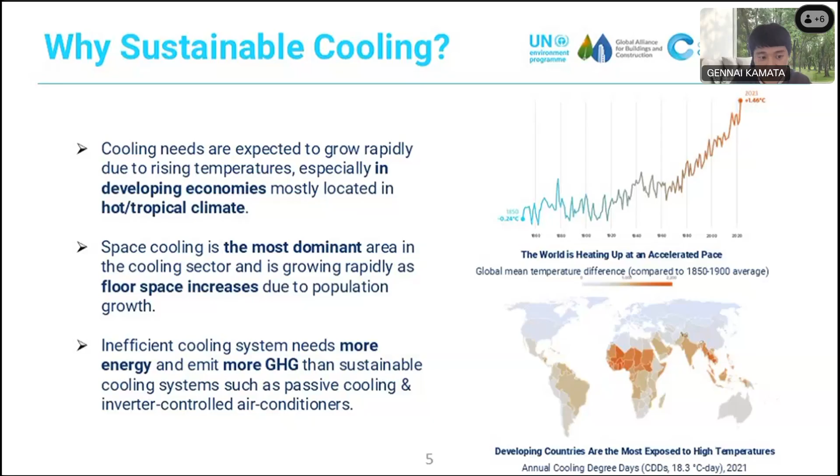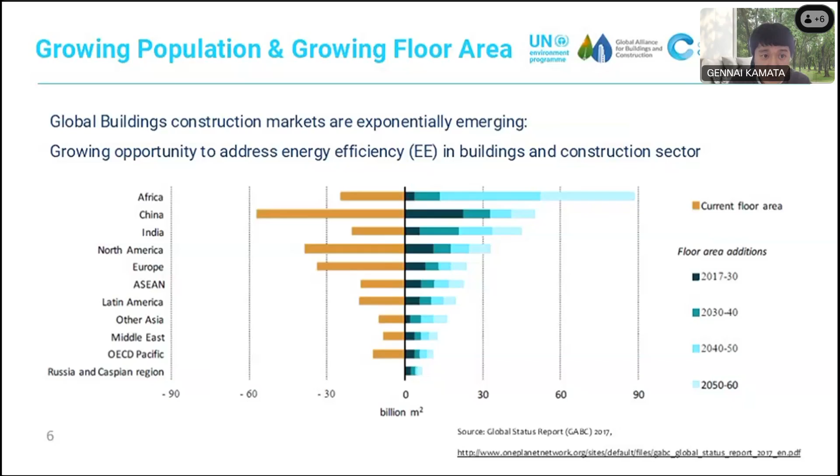So when we use cooling strategies, this needs to be very sustainable. When I mean sustainable space cooling, it basically covers passive cooling and also active cooling and energy efficient appliances such as inverter-controlled air conditioners. This phenomenon of increasing floor area is critically happening in Africa, China, India, and other Asian countries, just because these regions are having more and more population and urbanization.

Next slide. When I deep dive into the topic, first I want to mention energy consumption and GHG emissions in the building sector. This data comes from the Buildings Global Status Report, which was just recently launched this Monday. This report basically explains that one third of global energy consumption and CO2 emissions are actually attributed to the building sector. In the breakdown, we have more operational emissions than embodied carbon.

Operational emissions reached 9.8 gigatons, while embodied carbon reached 2.9 gigatons. Even though it is said that embodied carbon will reach the same level as operational carbon by 2050, we still need to address operational emissions through designing better buildings. Space cooling is one of the critical topics we need to address to reduce operational emissions.

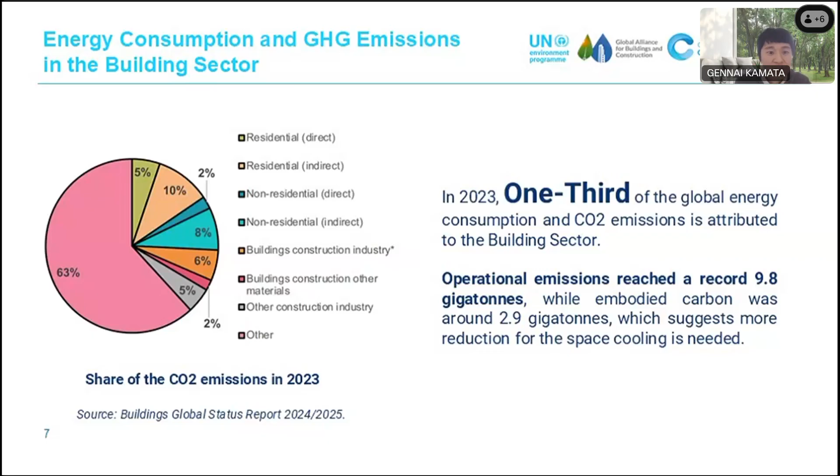As I mentioned, this is the global status report from the Global Alliance for Buildings and Construction. This annual report basically covers the progress of the building sector in terms of policy, finance, and technology. One of the critical topics is about cooling - it introduces data saying that cooling remains the fastest growing end use in the building sector, particularly driven by the Asia-Pacific region, having increased at an average rate of 4% per year since 2000.

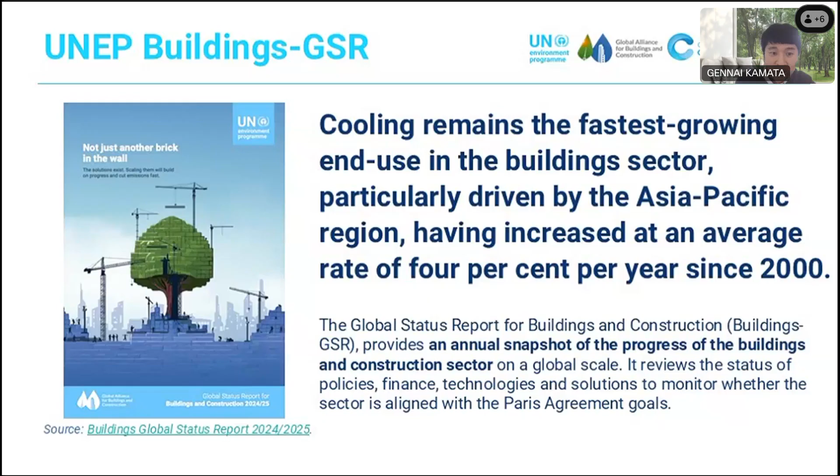And from the Cool Coalition perspective, we launched this Global Cooling Watch report at COP28, as Lily mentioned at the beginning of this webinar. It basically introduces a pathway towards near-zero emissions in the cooling sector. And one of the focus areas is passive cooling. It introduces one data point that says passive cooling can reduce cooling demand by 24% by 2050, saving up to $3 trillion USD in equipment costs and 1.3 trillion tons of CO2 emissions.

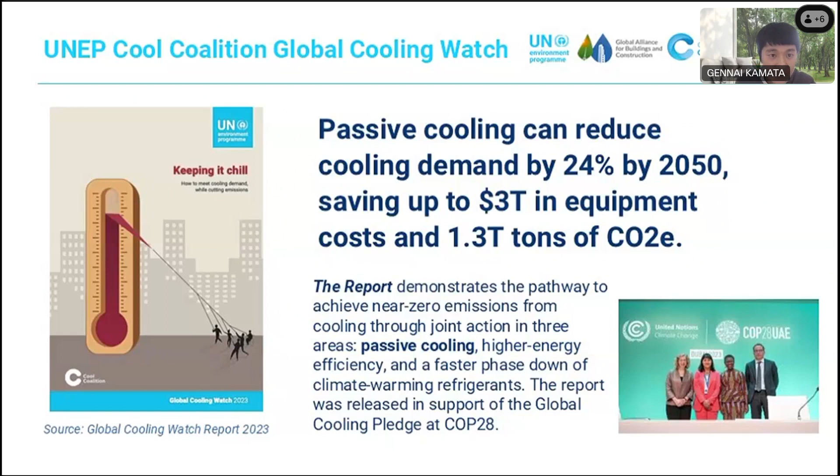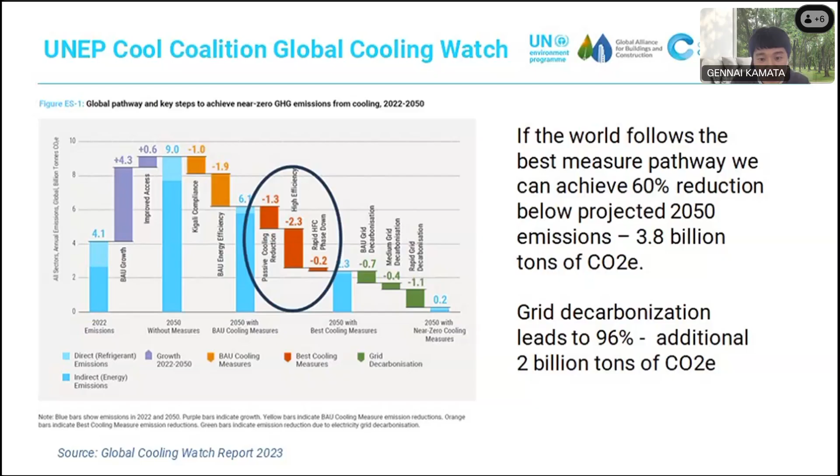So space cooling is a very significant area to address. From the report, it's estimated that in 2050, in a BAU scenario, we are emitting 6.1 gigatons of CO2 emissions. However, if we take measures such as passive cooling or energy efficiency in appliances, as well as a faster phase down of HFCs, we can actually arrive at 2.3 gigatons of CO2 emissions, which is a 60% reduction from the BAU scenario in 2050. And it can actually save 3.8 billion tons of CO2 emissions.

And now let me focus on this cooling finance report that we are going to feature in this webinar. This report was published last year. The main topic of this report is to size the market opportunities that sustainable cooling represents across emerging and developing economies. It also brings attention to challenges and opportunities for financing sustainable cooling in the context of these countries, and provides a blueprint on how to finance sustainable cooling. Let me introduce some of the data that we found from this report.

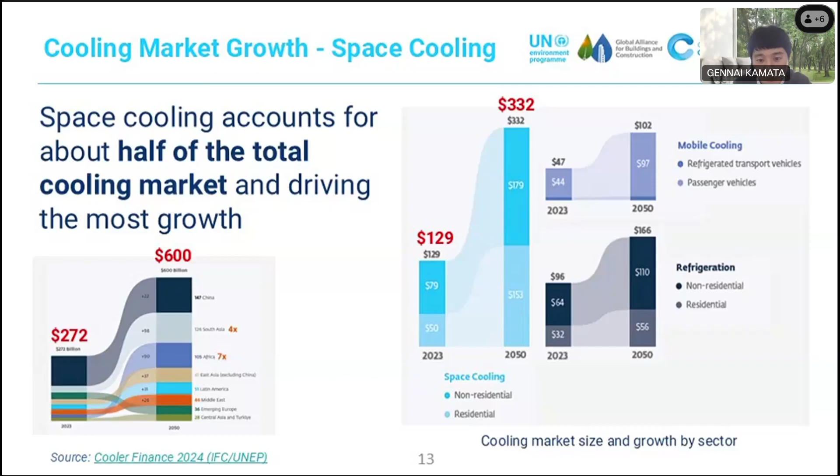And if you look at the breakdown of the total cooling market, space cooling actually accounts for half of it. If you look at the graph in the middle, in 2023, the space cooling market is 129 billion USD. However, it's estimated to grow to 332 billion USD in 2050. So this is going to be 3 times larger, and it's actually larger than other cooling sectors such as mobile cooling or refrigeration. And within the space cooling market itself, active cooling accounts for almost 90%, while passive cooling is 30 billion USD.

And also, if you look at building types like new buildings and retrofits, for new buildings the current market size is 15 to 25 billion USD per year, while retrofit of existing buildings is 10 to 15 billion per year. So now active cooling accounts for most of the share of the space cooling market. However, in order to achieve a net zero emission society, we need to accelerate passive measures, because these are low-hanging and cost-effective measures.

And the benefit of passive cooling is that you can save electricity costs in the operational phase of buildings. So if you accelerate sustainable cooling, consumers in developing economies can actually spend 6.4 trillion USD less by 2050.

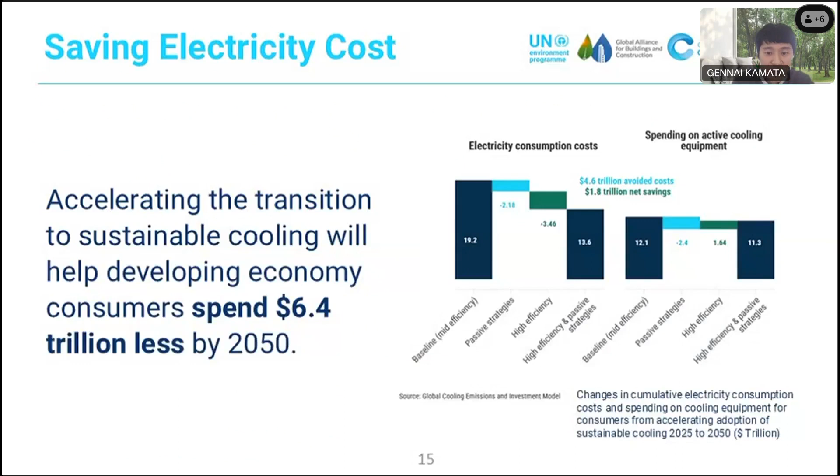So now let me deep dive into the solution part of passive cooling from the finance perspective. First, let me explain a little bit about what passive cooling is. I think most of the audience already understand this concept, but basically passive cooling is a measure that tries to reduce the dependence on active cooling, such as air conditioners. And these passive cooling measures have been with us since ancient times. So this is not a new technology.

The architects, design professionals, don't necessarily understand this concept, unfortunately. I am an architect, and I also had education in the university, but most architects are interested in how to design the building as beautiful as possible. They only look at aesthetic aspects, and they don't have the opportunity to learn about this kind of energy aspect. So in reality, even though these technologies are there, architects often don't understand this technology and don't reflect it in their buildings. And that's why it's not spread well.

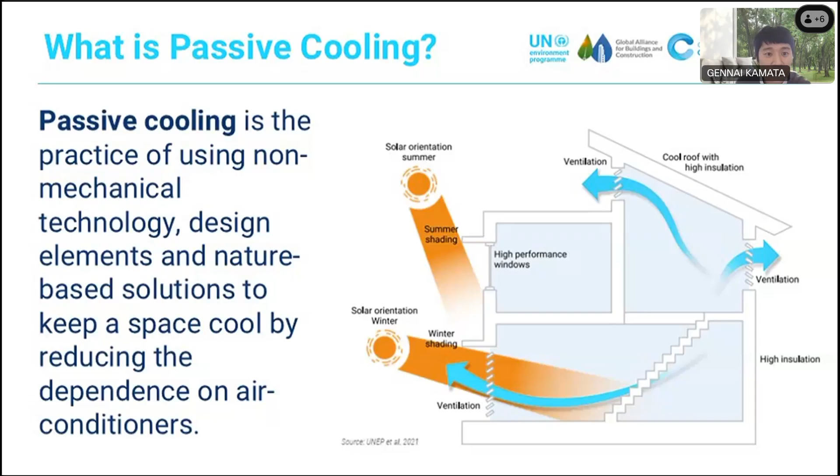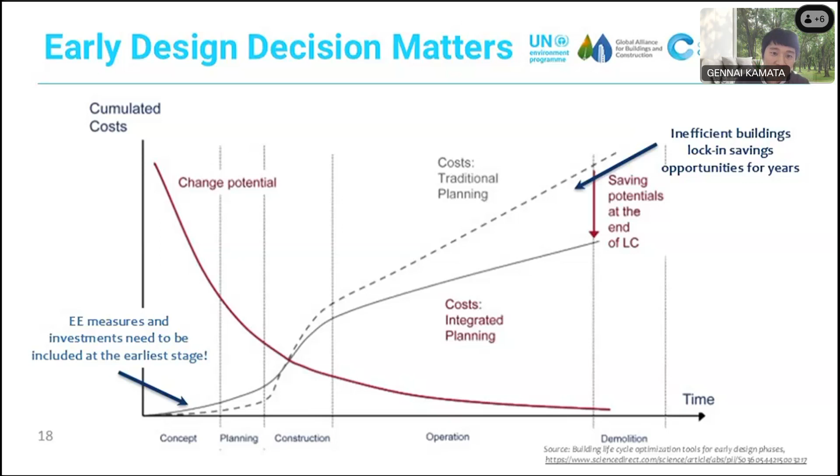This is very important because buildings last 50, 60 or 100 years depending on the type of structure. If it's concrete, it definitely lasts 100 years. In that case, this gap would dramatically become wider and wider. If you live in a traditional building, you have to pay tons of energy utility cost compared with a green building. That's why we need to look at the early design phases.

Now, thanks to the IFC, nowadays we have a great tool called EDGE software. It is very useful in that architects and developers can assess the energy efficiency and CO2 emissions of their buildings in the design phase. It covers not only operational energy, but also water efficiency and the embodied material aspect. It's important to make sure this gives you the idea of how to reduce energy consumption and CO2 emissions.

This can allow developers and architects to simulate return on investment. With these tools, you can estimate the incremental cost versus the payback period, so that you can understand the cash flow over the entire period of the investment, which works very well to convince your consumers in the future.

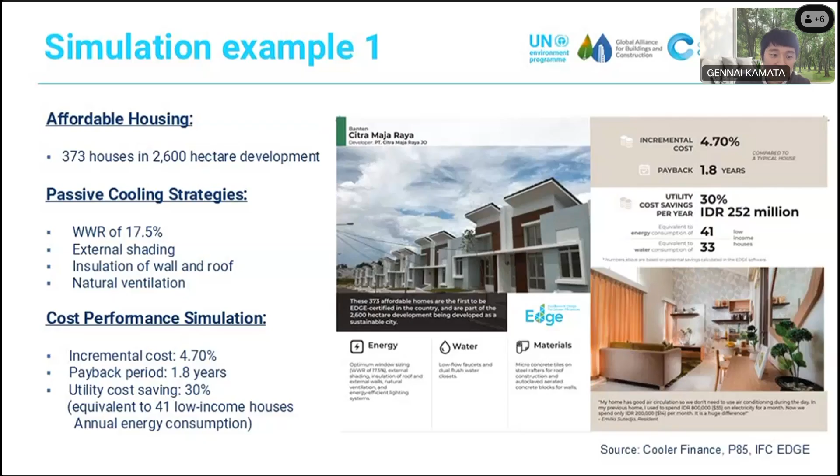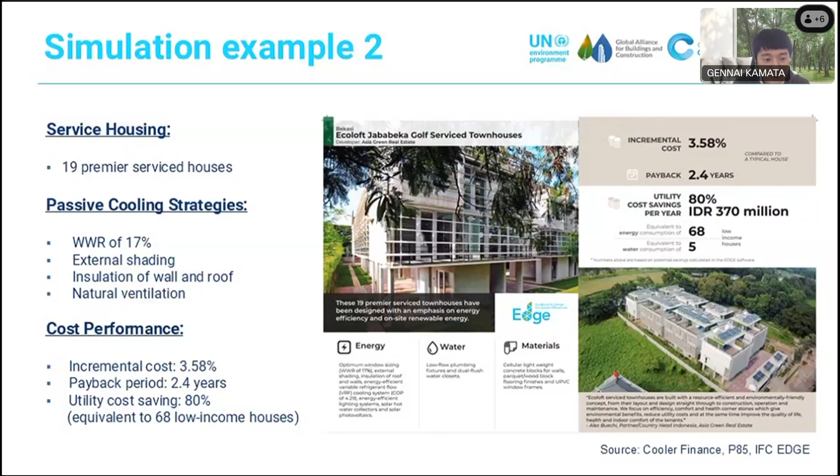And with the IFC EDGE tool, it calculated the building's actually incorporated window to wall ratio, shading, insulation, natural ventilation, and the tool actually calculated incremental cost 3.58%, and the payback period is just 2.4 years, and the utility saving cost is 80%. So this is a very useful tool to understand the cash flow.

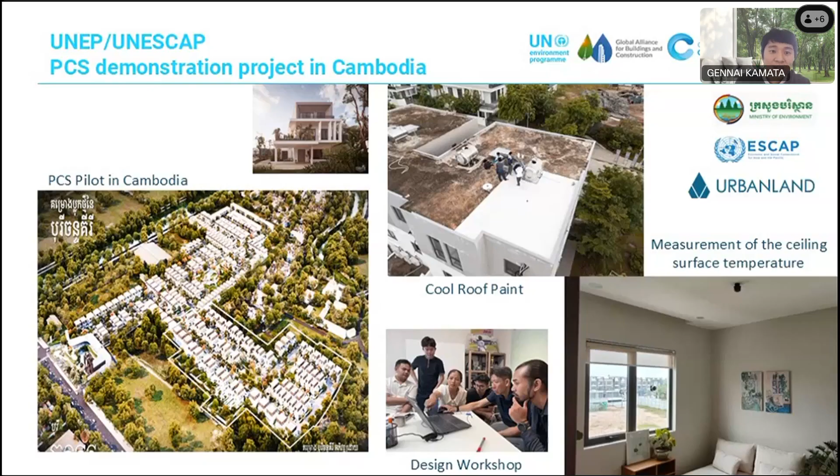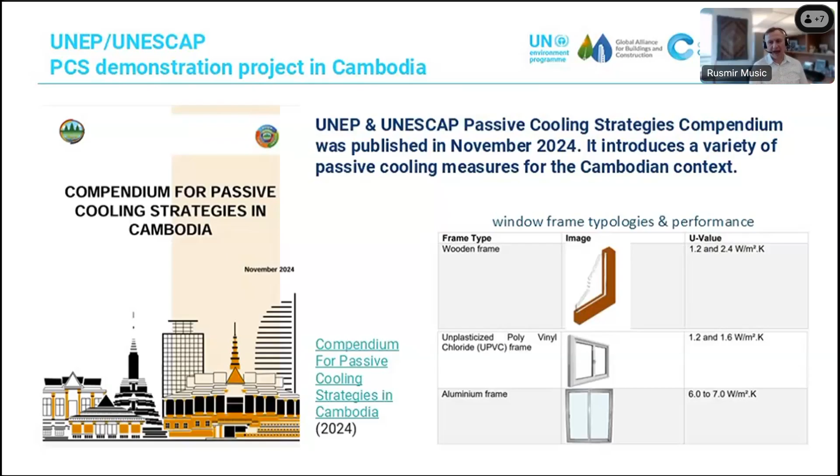So one of the questions was about CO2 emissions: how does energy efficient cooling technology reduce CO2 emissions? You actually can model that using the EDGE tool directly here. It's obviously going to be different between a hotel versus a home versus, let's say, an office. The idea is that we look at the efficiency of cooling and GHG emissions. It's not really just about CO2, in two ways.

Through a more efficient system, you're using less electricity. That electricity is typically powered by a dirtier electrical grid, and so efficiency in appliances reduces the need for more electricity. The second part, related to a question from Alan down below, is about leakage of the GHG gases that are used as coolants.

And there is an effort to change those as well. I will post the link in just a second, as Bolivar is talking, to our EDGE assessment for coolant gases that can be used in the systems that have what's called the lower global warming potential. So again, remember the CO2, or GHG, is being calculated on two of those things.

And then the one other question I think I'll answer now before we turn to Bolivar is really about the costs. One of the things you can see is that we launched the EDGE tool from IFC really in order to help the designers and developers calculate the upfront cost. I forget who had asked the question, but you are correct that implementing both passive cooling measures and more active cooling measures or other efficiency measures at the time of design is typically cheaper than doing a retrofit.

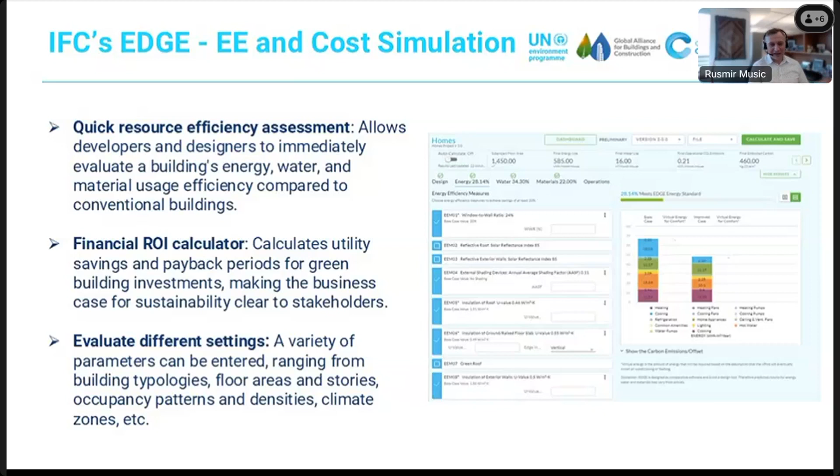Thank you to Genai for now. So Genai, if you fast forward, and then let's see if we can have Bolivar rejoin and turn on his camera. Bolivar, would you like to present directly? Okay. No, I prefer that Genai support me. Okay. Sure. Thank you. And good morning, good afternoon, good evening to all of you. Thanks, Rusmir, and all the team of IFC and Cool Coalition for this invitation. Do you hear me well? Yeah.

Okay. In this section, we will explore some technologies in HVAC that maximize energy efficiency, reduce operational costs, and contribute to sustainable development. This presentation is based on real projects, financial data, and emerging trends in high-performance building technologies.

My name is Bolivar Monroy. I'm technical director of Acaire, and I'll give you some points about Acaire. We have worked since 1981. We are a non-profit organization focused on the HVAC and district energy sector in Colombia. We develop training, exhibitions, and projects. And the last project that we support is TechEmerge Cooling in Latin America.

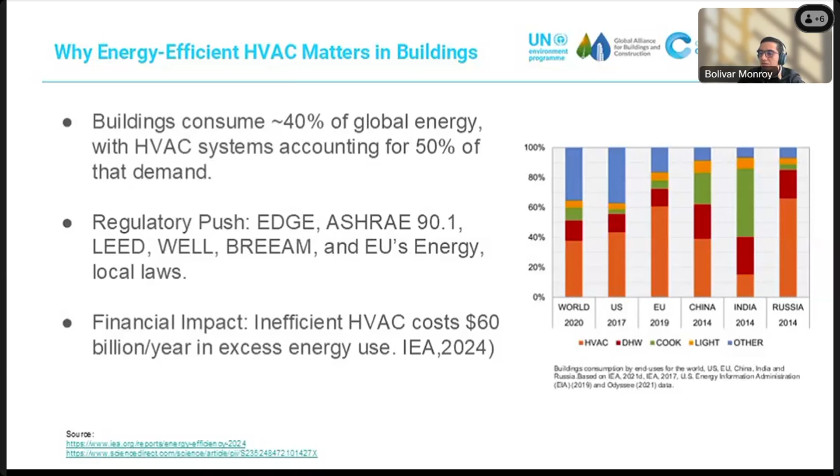But today we have a challenge to invest in technology that can avoid indirect emissions, which you see in the picture, and they are related to the use of energy. At the same time, as mentioned in the previous conversation, there are direct emissions related to the use of refrigerants. But the good news is that we have the technology to make this transformation possible.

Some of the trends we have at this moment are automation, optimized HVAC performance, for example with technology, with IoT, with artificial intelligence, the expansion of thermal energy storage, district cooling systems, and the adoption and development of systems with low GWP refrigerants for sustainable compliance. And now let's see some of them in real projects.

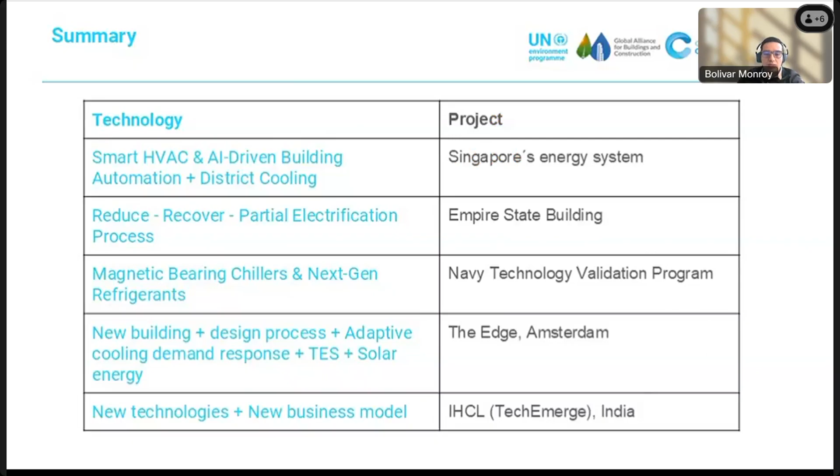This is a summary. You can see in this slide a summary of the technologies and the projects that we will explore quickly. In the next days, I think hours, we will send you this information and you can review it later. We have a mixture of different users, and the last one was a project developing the TechEmerge sustainable cooling strategy. And on the next slide, we have our first project, Singapore's energy system.

This is a mixture of a smart HVAC system, artificial intelligence, building automation, and the use of district cooling. Despite the need for high efficiency HVAC, many buildings still operate outdated systems, leading to higher maintenance costs and the opportunity to increase energy performance. However, advances in artificial intelligence, smart sensors, district cooling systems, and real-time energy demand response provide solutions that significantly reduce energy use and increase the ROI in these projects.

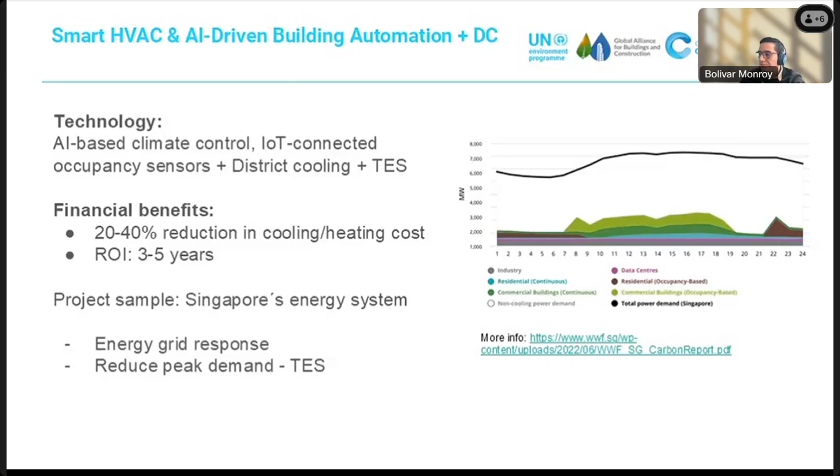This graphic shows all the information that Singapore used to decide; the information is useful to determine how the energy system adapts its operation and adjusts to improve performance. The next project is, now let's dive into a specific technology that is revolutionizing energy efficiency in buildings.

We explore retrofitting an iconic building, the Empire State Building in New York. This project was promoted by a law change: in the past 5 years, New York tightened the emission restrictions for each building in the city, and there was the opportunity of financial support for replacing and updating the system. As we can see in the graph, the project started with the optimization of the water circuit, then the implementation of technology that allows the reuse of energy, and later the implementation of heat pumps to electrify the water heating process.

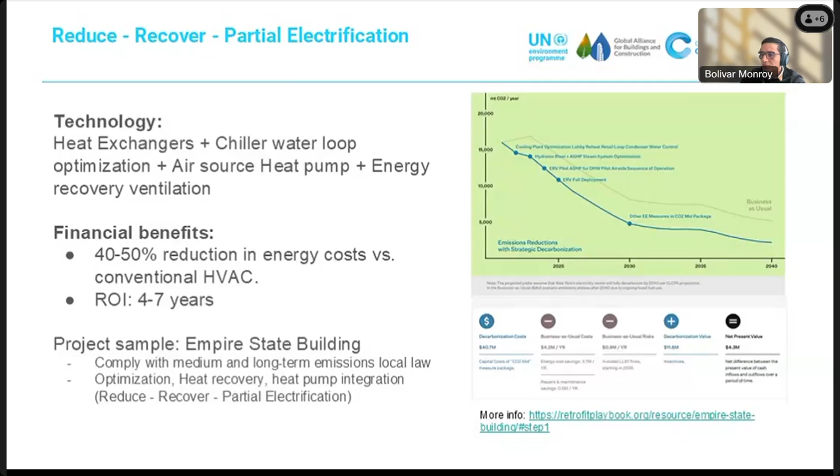Next slide, please. You can see in this graph the difference before and after the technology was applied to the building. You can identify the main equipment that was used. We can see how the cooling and the steam systems are integrated, looking for energy optimization. The total investment of this project allows an ROI of 4 to 7 years, depending on the operation. You can see the implementation, for example, the air source heat pump, some specific heat exchangers to improve the energy exchange for the cooling and steam systems, and some specific relation of both systems.

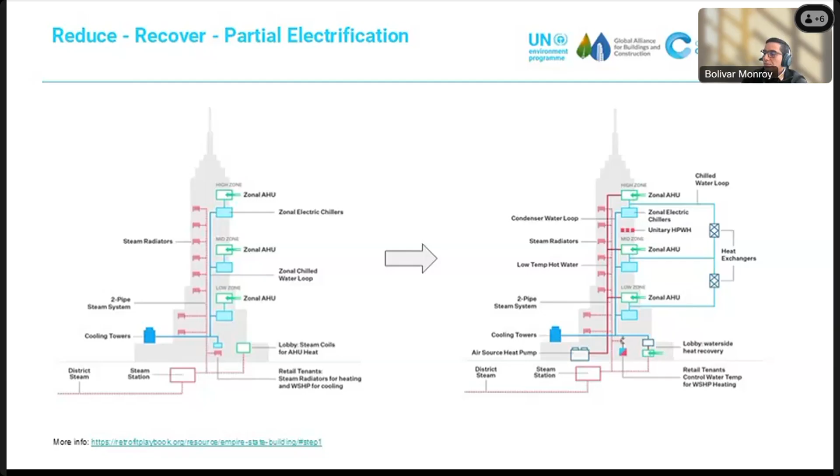For the next project, we have a specific retrofit related to the use of chillers, magnetic bearing chillers, and the next generation of refrigerants. Not only changing the entire segment results in a reduction of energy consumption. Chillers have been built with a compression system, and magnetic bearing chillers are now available with low GWP refrigerants. According to information reported by the U.S. Department of Energy, the use of this equipment reduced energy consumption by 65%.

If we look at the graphs, we can see Turbocor technology. Using this type of bearing significantly reduces consumption and increases performance with respect to the load. You see the Turbocor graph, the blue one in the upper graph, and in the lower graph you can see the operation improving the relationship between kilowatts and tons of refrigeration; it is the only technology that increases the performance.

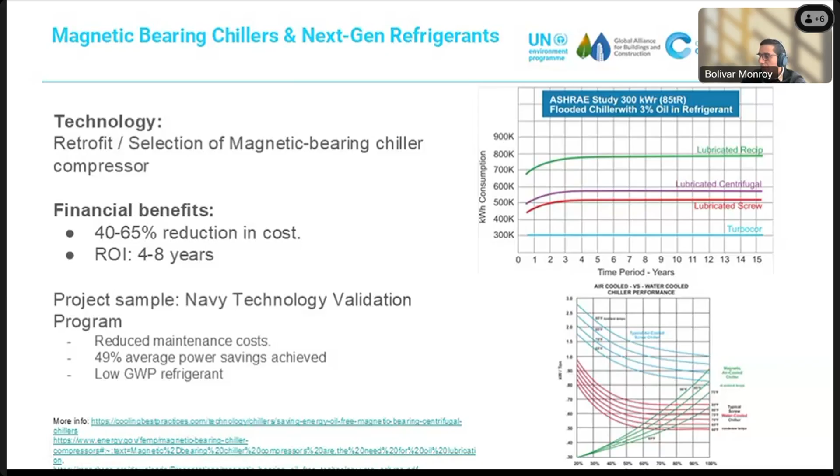For the last project, it's a mixture of different combinations and different things. The first is application of BIM methodology to design and build the building. The second is the mix of technology of passive and active strategy. The third is control and automation with IoT and a lot of sensors for each floor and office. And the last is the use of photovoltaic and geothermal energy.

The result of this project is an 18% lower demand versus a conventional office. This project is an opportunity to identify some characteristics related to orientation, natural ventilation, use of geothermal energy, and noise control that we can replicate in our countries.

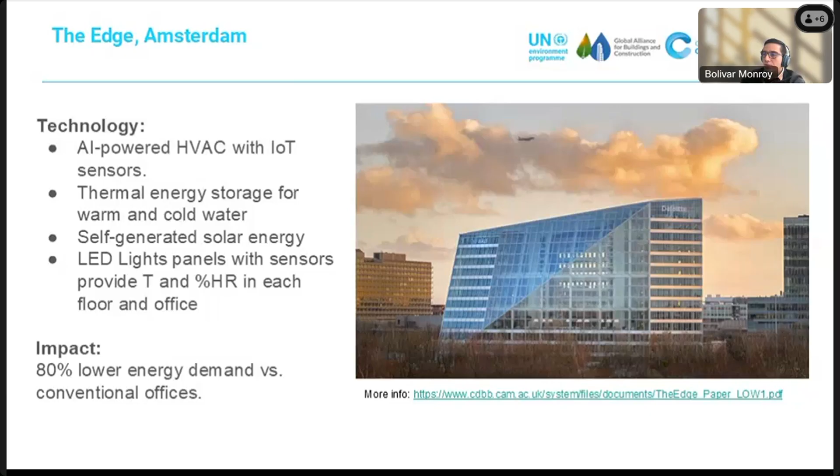This last project, remember, is not only the change of equipment resulting in better energy consumption. This project was born from a mixture of technology and a new business model. That combination includes, first, the IoT; second, the owner's focus on improving IEQ; third, optimization of project process with new cooling towers; and fourth, support with a good process of water treatment. The results are a reduction of 16 to 18%, or more or less 18 million in savings per year.

To finalize this part, I want to talk about 3 specific activities. The first is assessing your building's HVAC efficiency today. You must know how much energy your building consumes, in the case of existing buildings.

The second is exploring financial incentives and cost saving solutions. Don't worry about the money, this is not a problem. If you have identified the opportunity, you have a lot of financial tax incentives and other mechanisms to support this project.

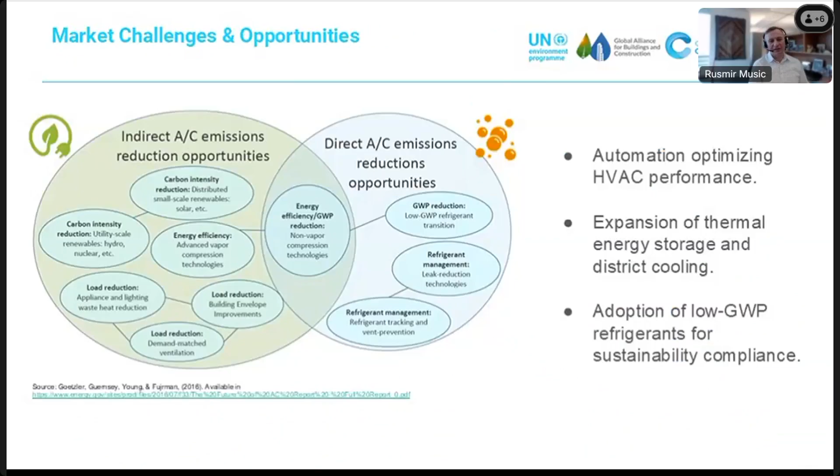Hassan has a question: could we have documentation of passive cooling? So Ganai, if you want to send that to me, all of the different case studies, including the Cambodia one — I think we have the links to the projects. Perfect, so we have it here as a link, and in the recap email we'll send it as an explicit link so people can find out what has happened.

There's a question on your experience and thoughts about using water as a universal natural refrigerant in heat pumps to complete passive cooling spaces. Maybe Bolivar, you would best answer that one. For example, if you look at the Edge project, you can find some information about the use of only water for heat pumps. They developed a strategy to use geothermal energy in the systems.

Probably we need some specific refrigerants to develop the heat pumps. The different heat pumps we'll have in the near future are related to some refrigerant. In some cases, for example in the US market, there's a lot of technology using natural refrigerants, not only water, for these types of technologies. In Colombia, we have some specific available heat pump technologies with low-GWP refrigerants. I think we probably need more specific technical knowledge to develop water-only systems, but we need to use some refrigerants to apply the heat pumps.